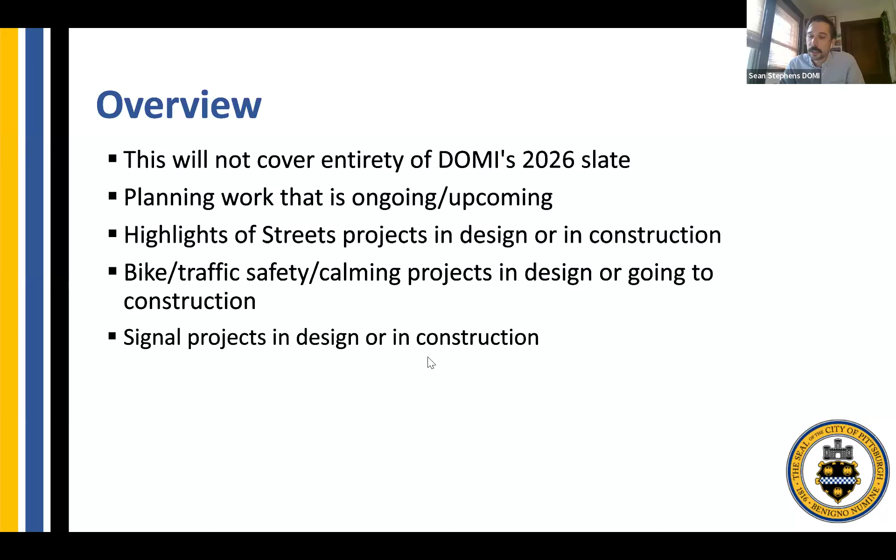We'll highlight some of the streets projects that are either in design currently or going to construction, and then talk mostly about Vision Zero projects, including bicycle traffic safety and calming projects that are either in design or going to construction in 2026. We'll also highlight signal projects that touch on some of the bike facilities in the city that have the opportunity for feedback or are going to construction this year.

First up is one of our newest projects, the Lincoln Avenue Multimodal Safety and Accessibility Improvement Project - quite a wordy title. This is in the East End, in the Lincoln-Lemington neighborhood of District 9. The extents are Atwell Street to Verona Boulevard. So once you cross over Washington Boulevard over that larger bridge and enter the Lincoln-Lemington neighborhood, that's where the project extents start, winding up the hill to almost the city line. We applied for a DCED grant, which we were awarded.

That grant is $750,000, which will include planning, design, and ultimately construction. We're first going to kick off planning work, slated to start in summer of 2026. We're still working through the grant agreement and execution. Planning work is forthcoming, and the scope is likely to include a combination of quick build and permanent hardscaping, as well as traffic calming elements and bike connections based off of the Bike Plus plan. We have planning, design, and construction money, and we're trying to do most of this as in-house design and use on-call contractors, but the final scope is yet to be determined based off the planning efforts. Be on the lookout for engagement on this project starting later this year.

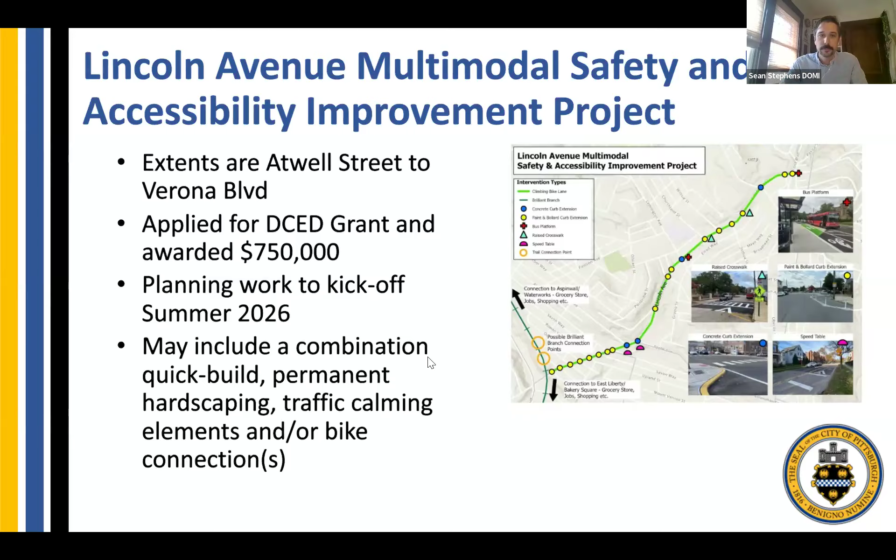Next up is another project in planning currently, which is the Schenley Park connector. This was part of a 2026 RAD ask that was funded to do a bunch of work in city parks across different locations in the city. I believe it was about $2.6 million total for the entire RAD-funded city parks projects, and almost 50% of that will be dedicated towards Schenley Park.

We developed several options to improve bicycle and pedestrian safety and connectivity through the park. The real focus is on connecting those park roads, with better connections to existing and future projects in Oakland, Squirrel Hill, and adjacent neighborhoods. Schenley Park isn't just used as a recreation area and for fun, it's also a big thoroughfare for people commuting, especially by bike and walking, into Oakland and Squirrel Hill. There's additional planning and outreach forthcoming, and we are partnering with Public Works and the Parks Conservancy on this project.

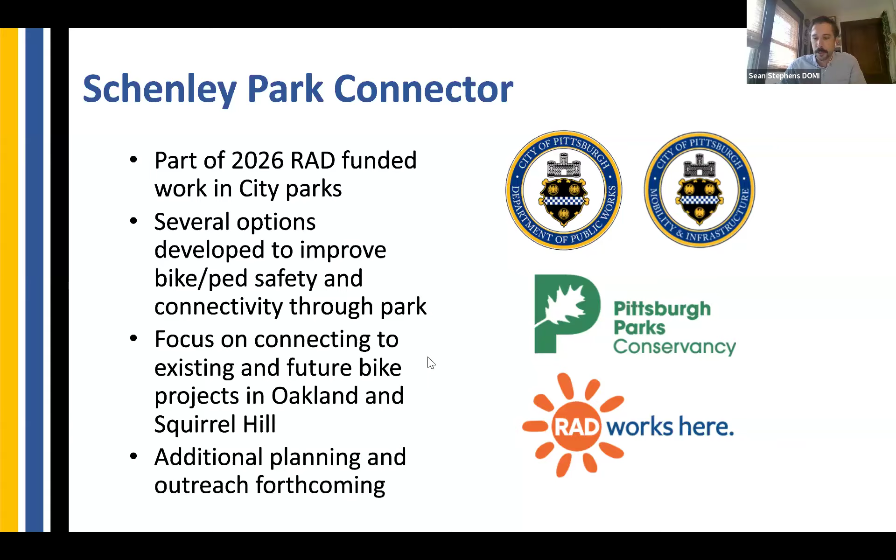Next up is some streets projects, starting off with East Ohio Street on the north side. I'm sure folks from the north side or involved in Bike Ped projects are intimately aware of this one. We did a multi-phase planning project that included not only the city-owned portion of roadway in the neighborhood, but also the PennDOT portion going from East Street to 16th and Chestnut. We were able to secure funding for the city-owned portion, between Cedar Avenue and East Street.

For those not intimately aware of the project, the biggest focus is on pedestrian and transit improvements through this corridor. You'll see things like a raised intersection, a raised crosswalk, concrete curb extensions, as well as bus boarding islands or loading areas, so we can service both front and back door and really provide a good transit platform through the corridor. Shown here is a map of the intersection of Cedar and East Ohio that includes protected intersection elements. There are bike facilities with a climbing lane on Cedar Avenue, and East Ohio Street has bifurcated bike lanes that connect to Allegheny Circle, where there are additional protected intersection elements we did with the two-way conversion project a number of years ago.

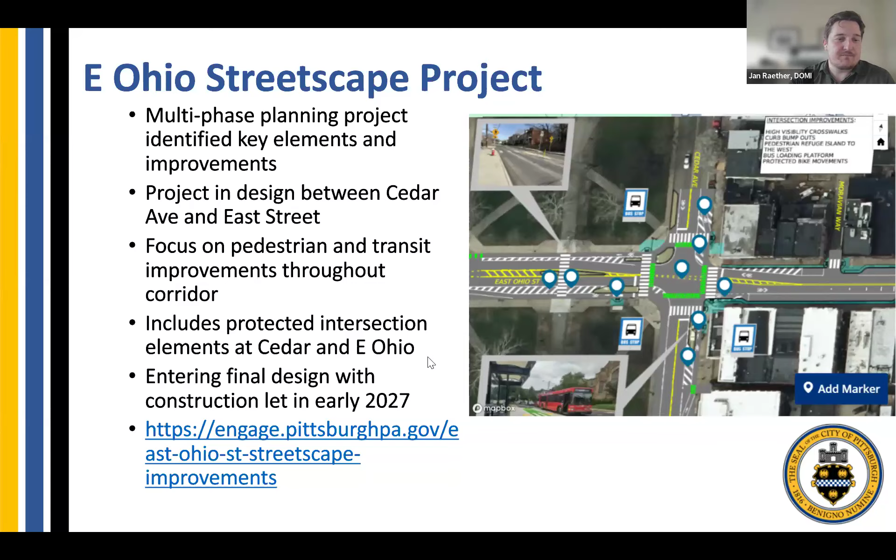So be on the lookout for that. And I'll jump in and say right now, all of our feedback on the Engage page is at Cedar and East Ohio. Would love to see that map get filled in with feedback between those stretches. The Engage page is in the chat, and we've got a tool in there where you can drop a marker. So encourage folks to do that if you're familiar with or use the corridor. Definitely.

Next up is our Critical Sidewalk Gaps program. This one's been around for a number of years with the main mission to fill in large gaps in the sidewalk network to link to essential community resources like schools, parks, transit stops, and senior centers. We partner with a bunch of different organizations and programs for this one, primarily Safe Routes to School, to make sure that kids walking to school can do so on an accessible, open sidewalk. This was established as a program in 2020, and the team has completed over 4.5 miles of sidewalk across the city, which I think is a really great achievement that goes under the radar in the whole slate of what DOMI does. So big shout out to Kyle Potter and Avasek Greenwell, who lead this program and do really great work.

For 2026, we have a list of locations developed with Engage pages that are created or forthcoming, so you can see where the planned work is for this year. One note - I think there's one project that's actually in construction right now on Summerlee Street in the West End, I believe. But like I mentioned, check out the Engage page for this, and you can also see some of the past projects and what that team does.

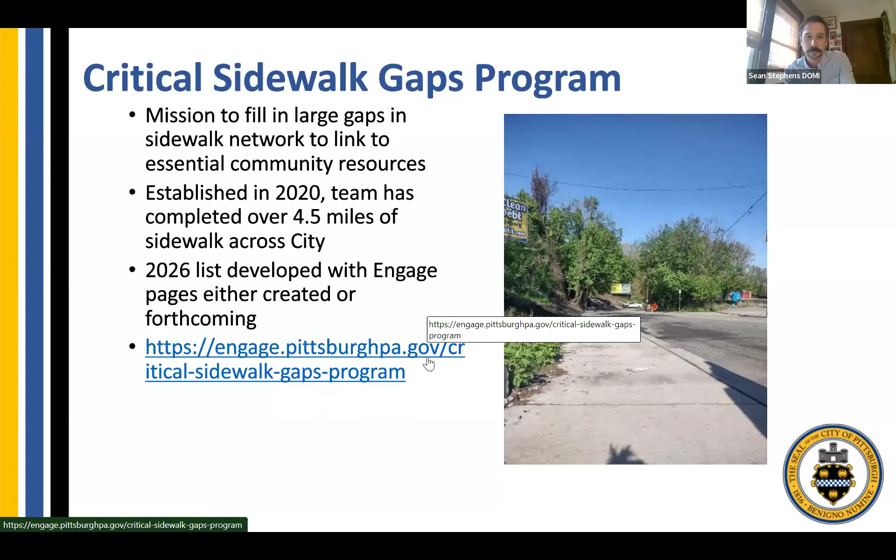Next up is our transit stop improvement program. This is a newer program that was only established last year, run through a partnership between our curbside management and policy folks, as well as streets who do the actual concrete work, and of course working with PRT to locate and fit in the shelter and make sure it aligns with long range planning and whatnot.

So this was established in 2025 through the capital budget, which funds shelters and sidewalk connectivity and improvements to transit stops. The added benefit, which is really great, is most of the time this improves intersection safety as well, because we're doing curb extensions or boarding islands, which have a nice traffic calming benefit and just overall general life improvement for transit riders.

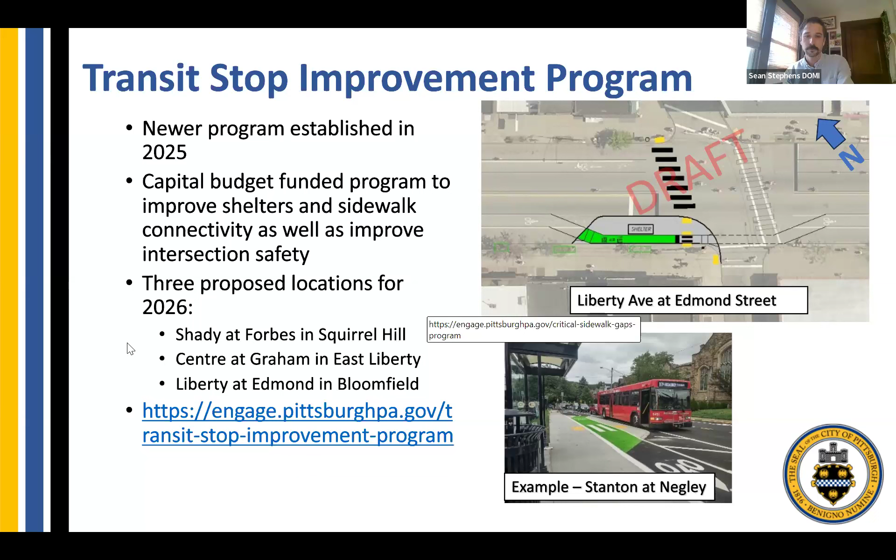Next up is sort of my bread and butter, which is the Vision Zero projects for 2026. I co-manage this with Paige Anderson, who I'm sure a number of you are familiar with - she's another project manager working on these projects. For 2026, the capital budget has allocated $1.1 million, which is about the same as last year, so that's really great to maintain. And this also funds more than just project implementation, but a couple other elements, which I'm going to talk about.

On the project side of things, we've identified 15 locations and projects to do intersection safety work with targeted improvements towards vulnerable road users—our pedestrians and bicyclists. That can include raised crosswalks, quick build curb extensions, hardscaping where budget allows, as well as upgrading some of the vertical elements we use.

We also have 8 locations targeted for traffic calming, which would be more traditional speed humps and speed tables on our local residential streets.

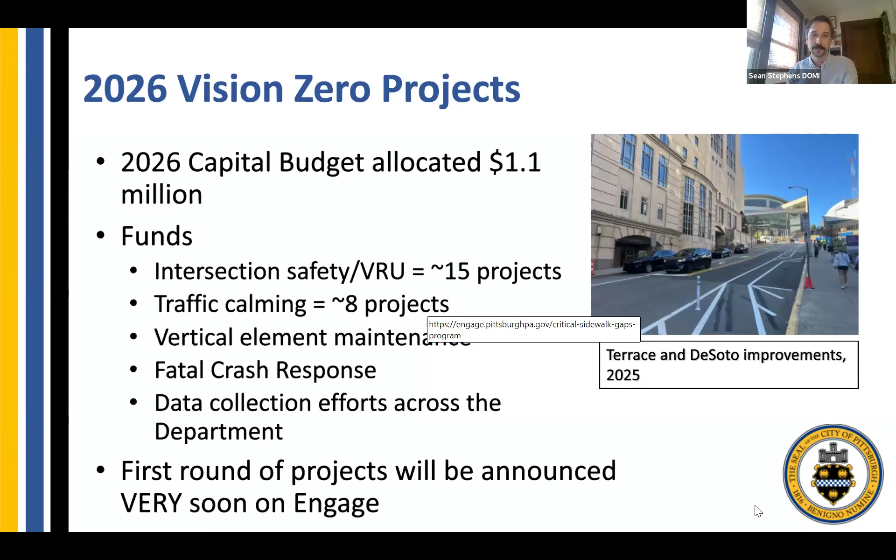Now moving on to some of our more bike-focused projects. Some of you might recall the Second Ave cycle track connector to link the 10th Street Bridge to the Eliza Furnace Trail. This will be using part of 2nd Avenue and actually a parking authority lot to get you on the trail. Right now it's very disjointed and there's a gap here.

Part of the reason this has ebbed and flowed is it's integrated with the Smart Pittsburgh signal projects, also known as Smart Spines, to upgrade signal connectivity through 5 major corridors within the city. That will be taking care of some of the signalized intersection components of this project.

But the plan is to use quick build materials and precast concrete curbs to do a very small road diet on 2nd Avenue to carve out a bit of space for a cycle track to get you from 10th Street Bridge to the Eliza Furnace Trail. This is entering design, with the aim of construction in 2026. An Engage page is forthcoming as well.

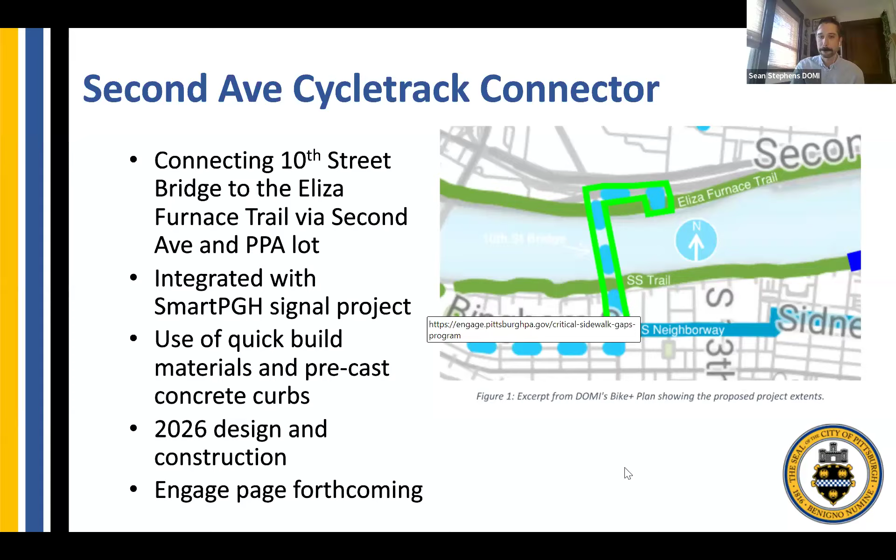Next up is Stanwix Street, downtown. This is between Forbes and—excuse me, it's actually Forbes and 4th Avenue. And I'm sure many of you who bike downtown have...

...seen some persistent issues with parking in the bike lanes here. This project is really aimed at curbing that—pun intended—where we want to allocate additional space in the roadway for loading that happens at adjacent buildings, to keep the bike lanes open. We're not going to be changing the bike facility at all; there won't be a degradation there. It's mostly reallocating roadway space and doing a small road diet on Stanwix Street to accommodate loading.

We're working with Safe Routes to School and City Charter in that adjacent building on these efforts, and this is a 2026 deliverable as well.

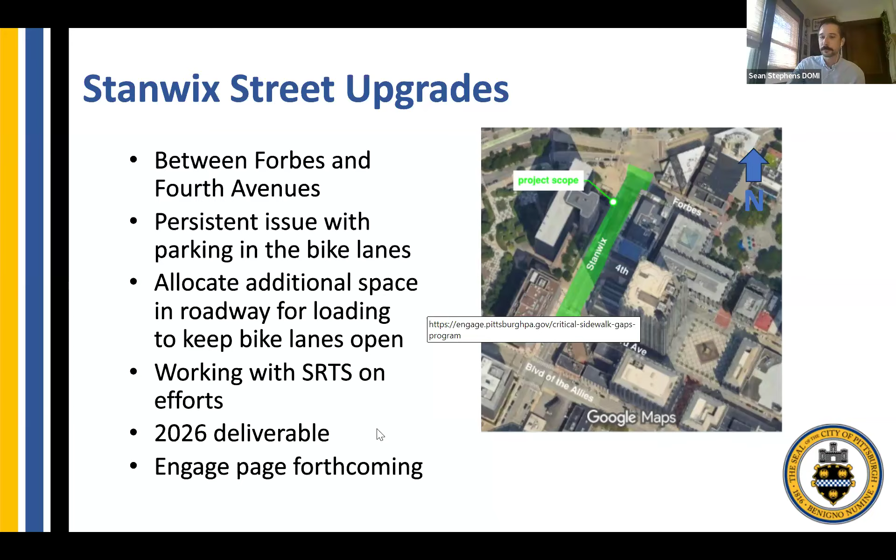Some projects are carryover from 2025. For those who live in the South Side, I'm sure you know about the South 18th Street project that we did as a traffic safety corridor last year. We were only able to partially install in 2025 due to utility conflicts.

As everyone knows, PWSA and People's Natural Gas are seemingly everywhere, so we try to coordinate with them to make sure we install things that don't get ripped up in the same construction season. This was one we coordinated, so we were able to install Carson to Crossman, which included the bicycle climbing lane, some speed tables, and other intersection elements, but we were not able to install Crossman up the hill to Monastery.

The utility work there is at completion or very, very near, so this should be one of our first projects right out of the gate in the spring to finish this off. If anyone is not aware of the project, there's a really great Engage page that shows a schematic of what's been installed and what's left to be installed. Before we enter construction for this final phase, we'll update the Engage page and issue a press release as well.

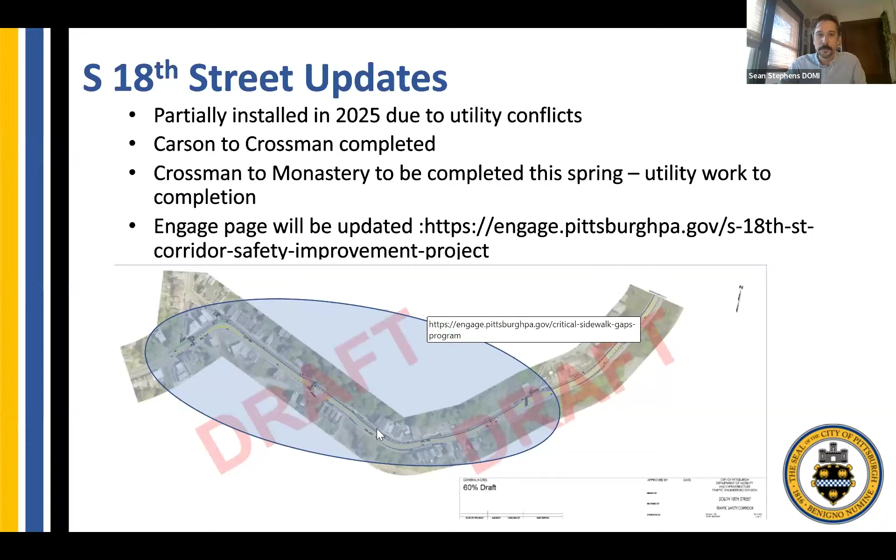There's also a few other carryover projects from utility conflicts or coordination. There are 3 traffic calming projects on Baytree Street, Itin Street in Spring Hill, and lastly Lorenz Avenue in Elliott. If any of you were involved with the West End Mobility Study, I know Lorenz Avenue was a focus, so that was sort of a neat little overlap where we were already targeted for traffic calming on Lorenz as a deliverable.

So be on the lookout for those this year. There are also 2 intersection safety projects that include a pedestrian refuge at Highland and Jackson, and additional intersection improvements at Murray and Welfer in Greenfield, both coming this year. Most of these already have Engage pages, so if you're not familiar, please check them out, and we'll announce construction when they are ready.

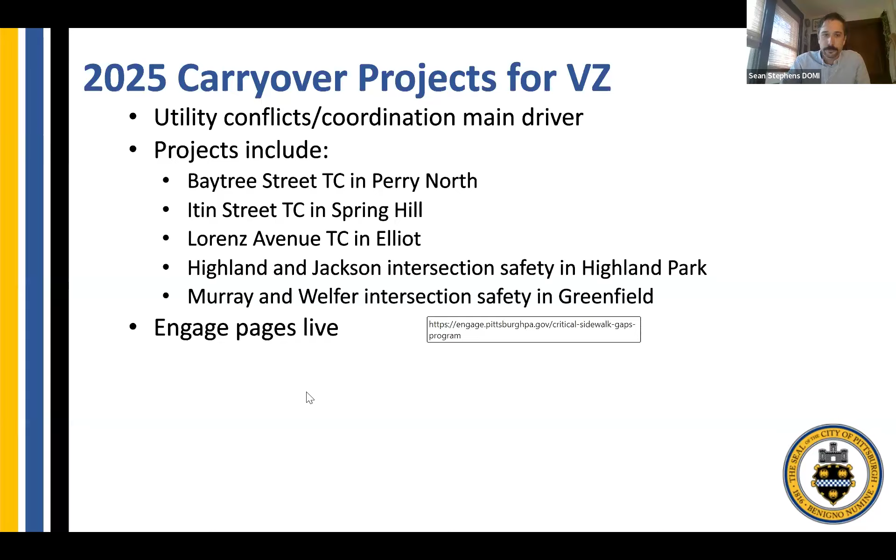Now a little bit on traffic signals for 2026. This is a very small subset, to be honest, but ones I wanted to highlight for this group. Beechwood Linden Wilkins is a full signal upgrade through our capital budget with some grant funding. This has gone through a planning process with a pretty large community meeting, I think end of last year or maybe early this year, that includes some really great protected intersection elements.

There's an Engage page that has a lot of good materials on what we're planning, and this is going to construction in 2026. We are just wrapping up some final aspects for design and then working through some permitting with PennDOT, as Wilkins is a state-owned roadway.

Next up is Brighton Heights Boulevard at California and Terman. We're working on a complex intersection analysis at this location in Brighton Heights, where we've developed 2 alternatives: one including a realignment of the intersection, and another with just traditional curb extensions, with the biggest goal of improving connectivity for pedestrians, since some of those crossings are quite long. It's one of our lovely 5-point intersections, which is a bear to navigate for everyone, I think, so we are still collecting feedback for this location.

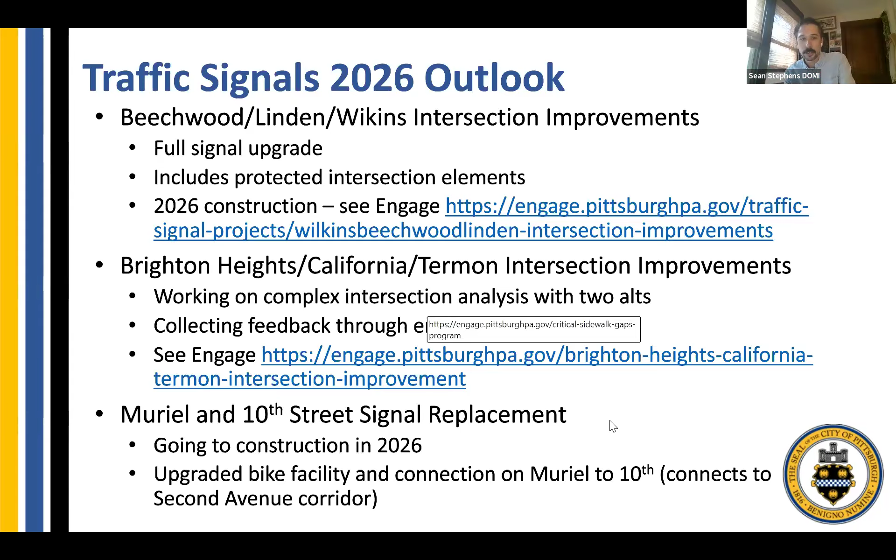And then last but not least, I'm going to turn it over to Jim to talk about the Strip District.

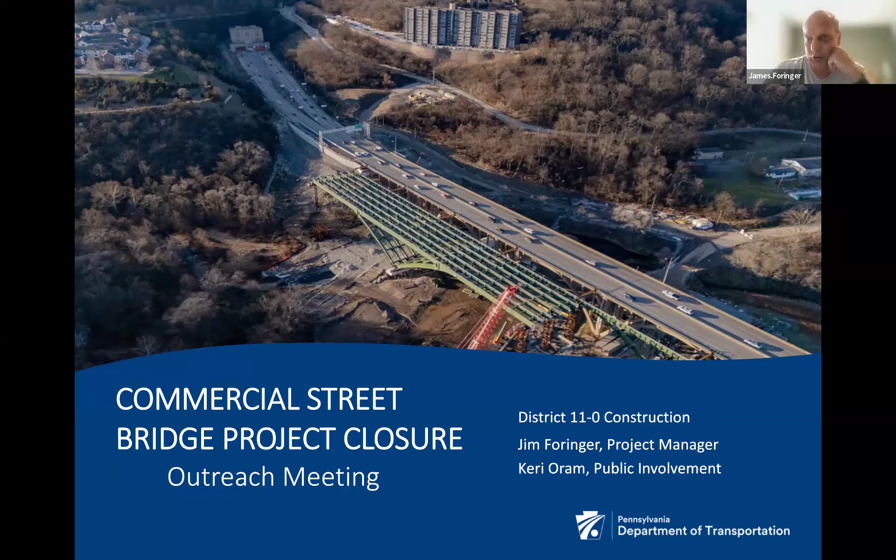We're excited to talk to you about the Commercial Street Bridge project, and it's very exciting for all of us. We're going to give you a quick project summary, an update of where the project is, the timelines, and go over the detour routes. And the extensive public outreach that we've been performing is our reason for talking to all of you tonight.

To put it in perspective where it is: it's a $95 million project. Fay S&B USA is the contractor, HDR from downtown was the designer, and Michael Baker is doing CM/CI support, construction management and construction inspection. It's funded by Federal Highway, and it's a PennDOT District 11 project, so they're the owner managing the project overall. The project is over Frick Park, just east of the Squirrel Hill Tunnel, and kind of adjacent to the old Irish Center.

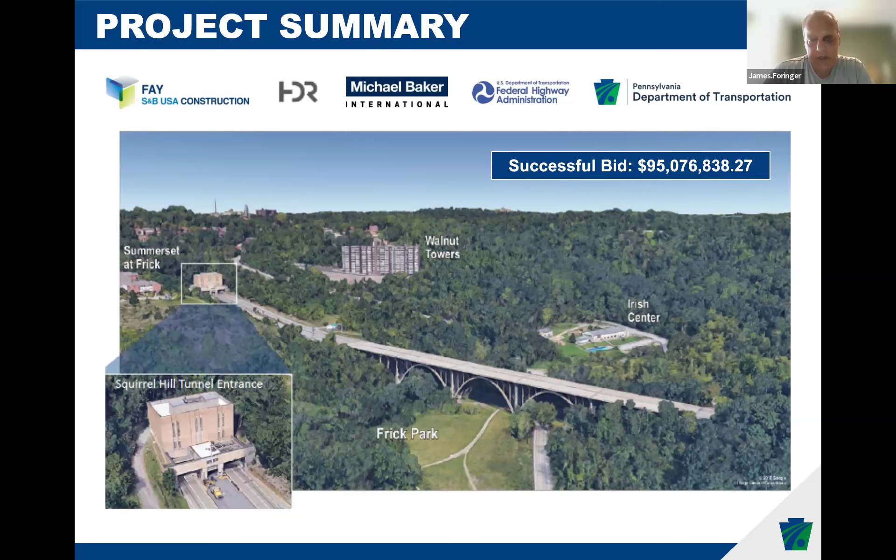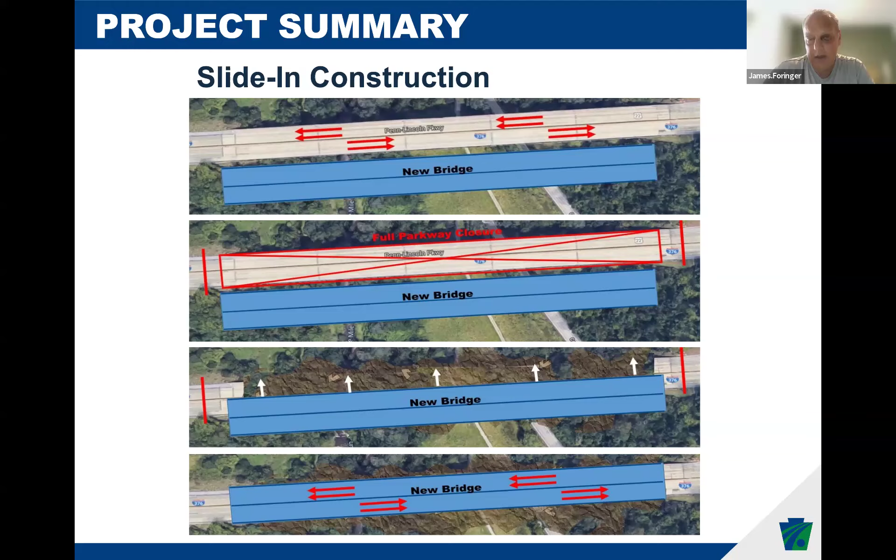A lot of you maybe have been wondering if we're relocating it, if you've been driving past there or even riding your bike underneath it. We're building a new bridge, actually off alignment, and we're not realigning the parkway. So we're going to have a full parkway closure, demolish the existing bridge, and slide the new bridge into place laterally. If PennDOT had not done it this way, it would have taken about 4 years of lane closures, changes, and traffic impacts. Instead, this is going to be done in 25 days, and we'll give you more details on that. To put it in perspective, the bridge weighs 22 million pounds, so it's extra expense for PennDOT, using the best technology out there.

As for project updates, you can see the structural steel was completed back in February. We're now in the process of forming the bridge deck, and the entire bridge deck is going to be on the bridge as well. Currently, Commercial Street is reopened.

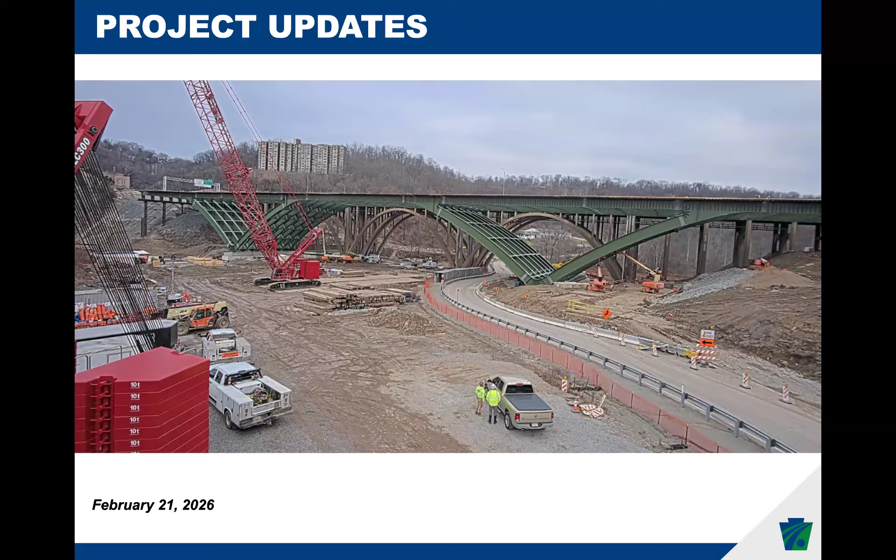So that's kind of the status of where we are now. The project timeline: we started back in structural steel last summer, we completed that, and then the foundations.

After we get the bridge deck on, we have to perform a small temporary slide to make sure all the equipment is working before we shut the parkway down and implode it. We'll give you the exact dates, but we'll be closing the parkway for 25 days, then doing cleanup and restoration under the bridge. That area will be fully restored, with close to a year of restoration work done under the bridge, completed next June.

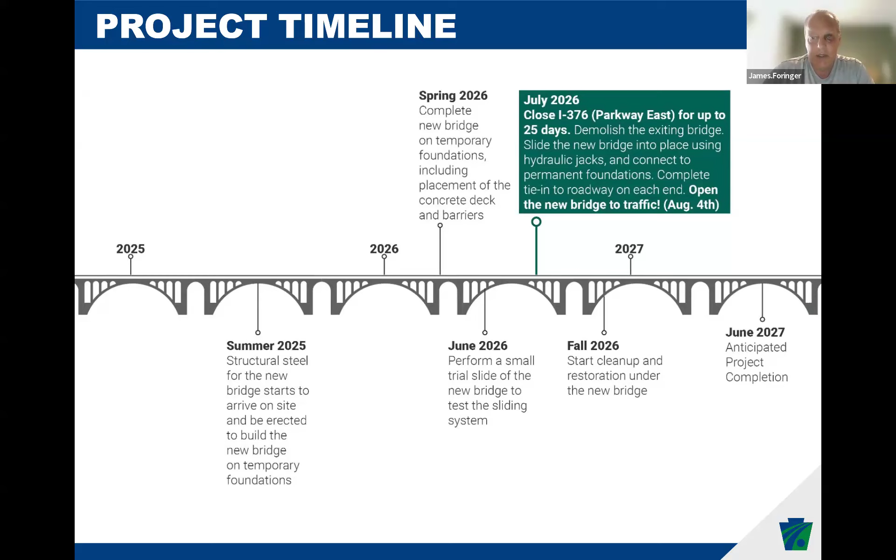As for future traffic restrictions, Commercial Street, which includes the 9-mile run trail, will be closing sometime in June. We'll probably close it for a day or two to do that temporary slide, then reopen. The contractor is working with the department to keep it open as much as possible. We realize what a vital link it is, with many bike users and hikers using the trails. Then we'll do cleanup and reopen in mid-August, though we're hoping to beat that date.

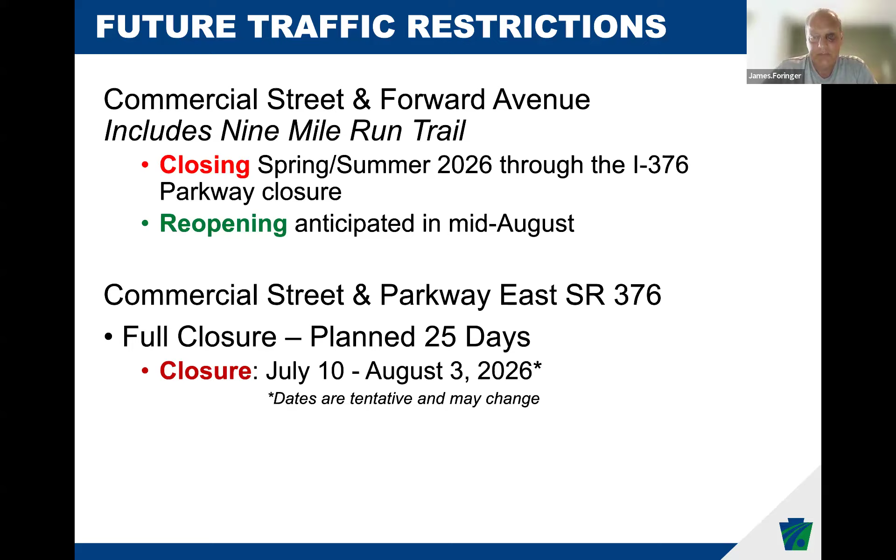The most important dates for the traveling public, when it's going to be shut down, are July 10th to August 3rd. Those are tentative, but we're on schedule right now to make those dates. Unless there's something unforeseen we're not aware of, we'll be shutting down the parkway and detouring 100,000 cars a day. So what do those detour routes look like?

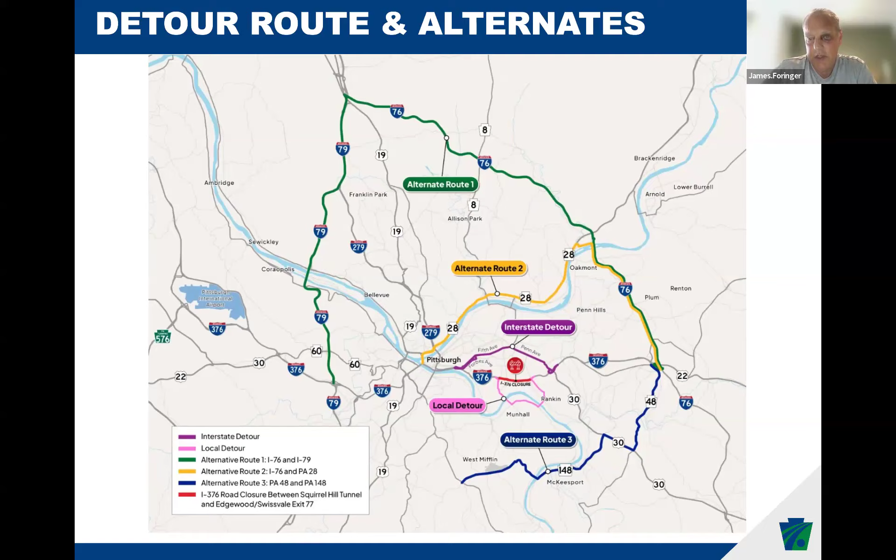We recognize they're not ideal detours. The green, yellow, and blue alternate detours you see there—we're trying to encourage through travelers to use the alternate detour routes. That means staying on the turnpike, going up to 79 and coming back down, or getting off at 28 if you're coming into Pittsburgh and want to route around, or even going south across 48 and through McKeesport over to West Mifflin.

Zooming in on the project site, we're closed right there at the project area. The Commercial Street detour is shown in blue.

The purple detour is the interstate detour, basically from Forbes Avenue on the west side to the Wilkinsburg exit on the east side. Coming westbound, the detour is getting off Penn Avenue up to Fifth Avenue through Oakland, then back down Fifth Avenue and that slip ramp back down onto the Boulevard of the Allies, and vice versa coming eastbound.

The local detour, shown in pink, is getting off right at Squirrel Hill, going down Beechwood Boulevard, Browns Hill, making a left and going out 8th Avenue, Route 837, back across the Rankin Bridge, back up Braddock Avenue, and getting on the Parkway eastbound at Route 30. Again, these detours aren't ideal, but we're going to man them.

There are some associated ramp closures I'm not showing for the sake of time. The Bates Street on-ramp heading eastbound will be closed. Coming out the Boulevard of the Allies will be closed for getting down onto the Parkway, so they'll have to go on to Forbes Avenue and take the detour. Coming westbound, there's an on-ramp out at Churchill that's going to be closed.

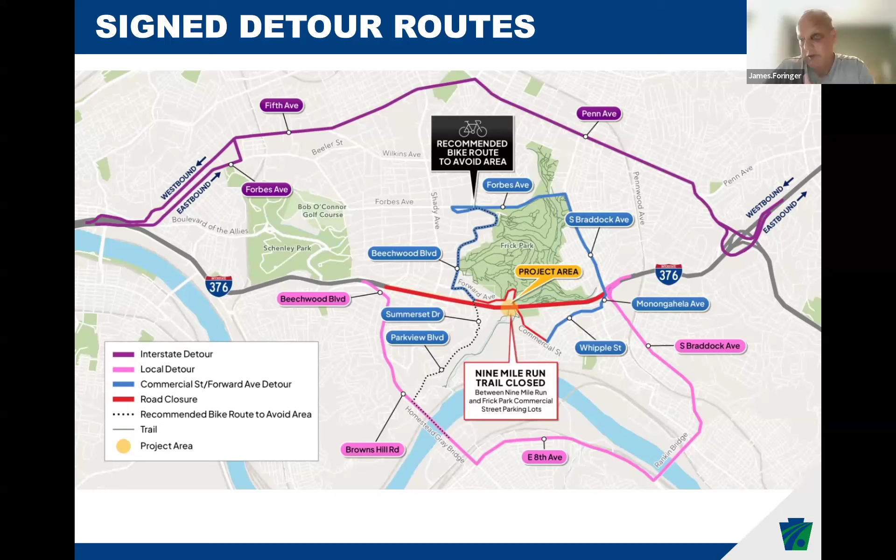People will just have to continue on down Penn Avenue. And there's an on-ramp westbound out there that will be closed coming from Route 30, because there's no sense in them getting on when they'll just have to get back off and detour.

We've identified police locations, working with the city and with DOMI. We know that's a lot of off-duty police officers to staff, so we have them prioritized—really prioritizing the interstate and the local detour routes, not the other areas through the communities. We want folks to use the detour routes and not jam up the neighborhoods. With these major detours, we'll be reacting once it's closed and looking at pinch points and what we can do to improve the workflow.

Along the intersections on the interstate detour route, we've been working closely with DOMI. They're upgrading other signals to make them operate more efficiently with timing, so they can even adjust those timings during the closure.

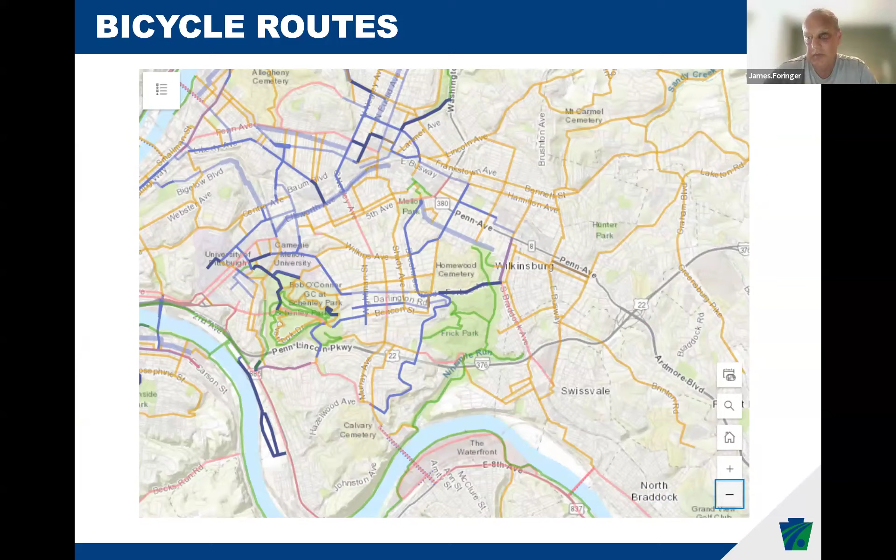We've done extensive coordination with emergency services. We've had two incident management meetings, and we'll be having a third one. With the city of Pittsburgh, the contractor is going to provide an extra UTV for emergency services, so there's one on each side of the closure, because of the trail users that have shared with us there have been some pretty serious accidents.

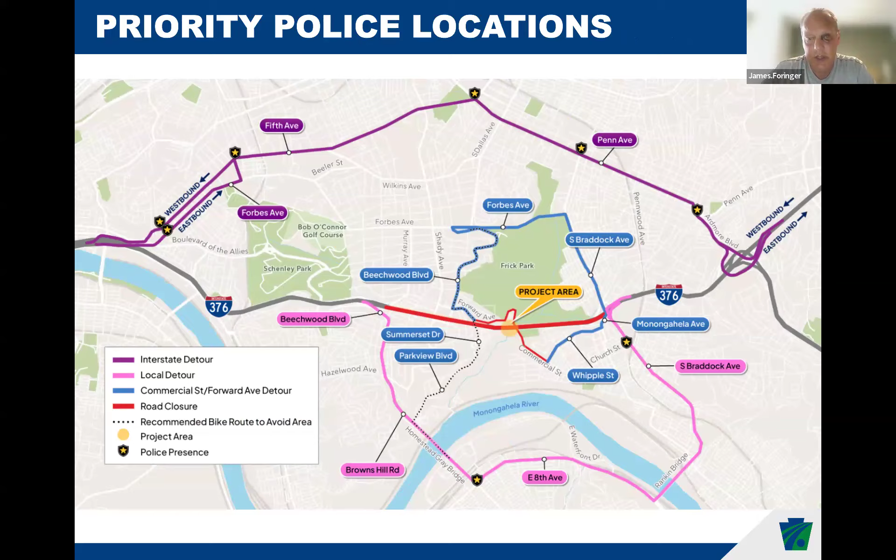They're doing some other staging for responses. We're meeting with Chief of Police Cogs and the Mon Valley Emergency Services. We've met with the UPMC hospital folks for their services, so they're aware. We've been doing extensive coordination with them.

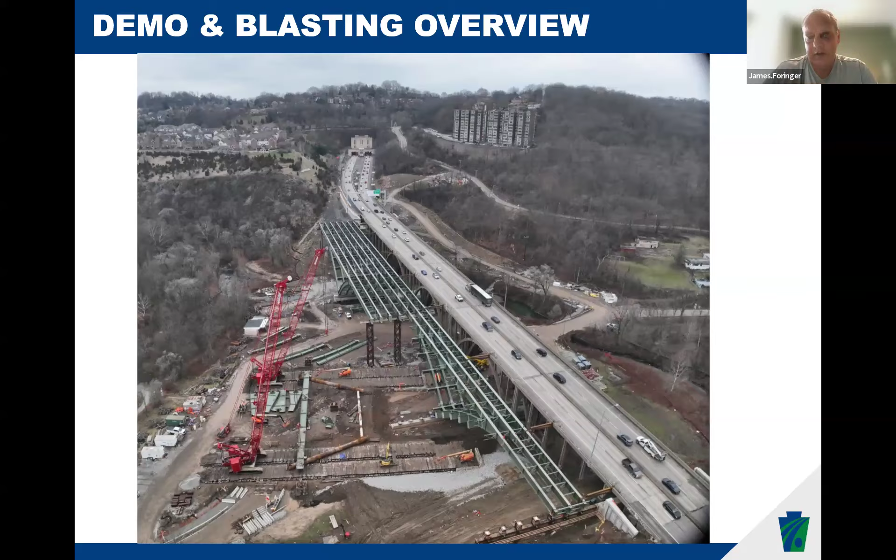The other thing I wanted to show you is how much is involved. This is an aerial view before all the structural steel was set. Why it's important, if you know trail users—and quite honestly that's why I think I can relate, I've honestly walked through places I shouldn't, or ridden my bike through places I shouldn't—that's just kind of a natural tendency. So this area is not going to be safe when we close, and I'm going to show you why. It really is not safe to go under this bridge after the closure.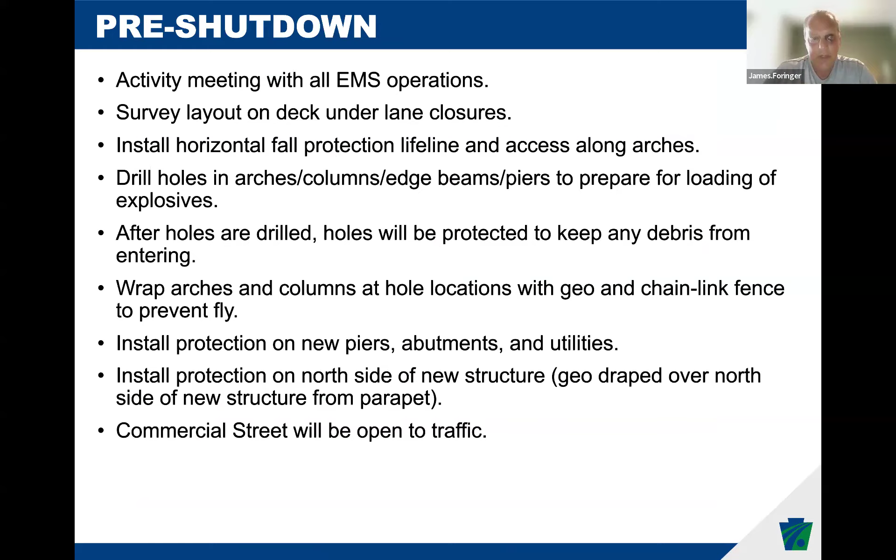They're going to be starting from the center of the bridge out each direction with conventional demolition. They'll have big hoe ram equipment and jackhammers up there, and they're going to be actually dropping concrete down below, so that'll be flying everywhere. It's not going to be safe to be anywhere close to this bridge.

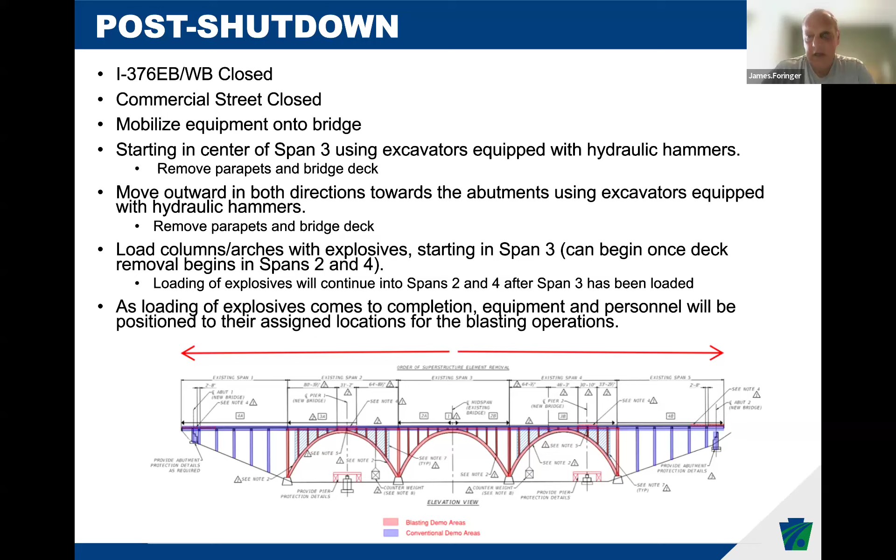We've already talked with the park rangers. They'll be up on the trails blocking them off so folks don't come down—we know from Greenfield that folks try to sneak through the woods. So one thing we've set up is EMS helping us with infrared drones, and we will not set that blast off until it's clear.

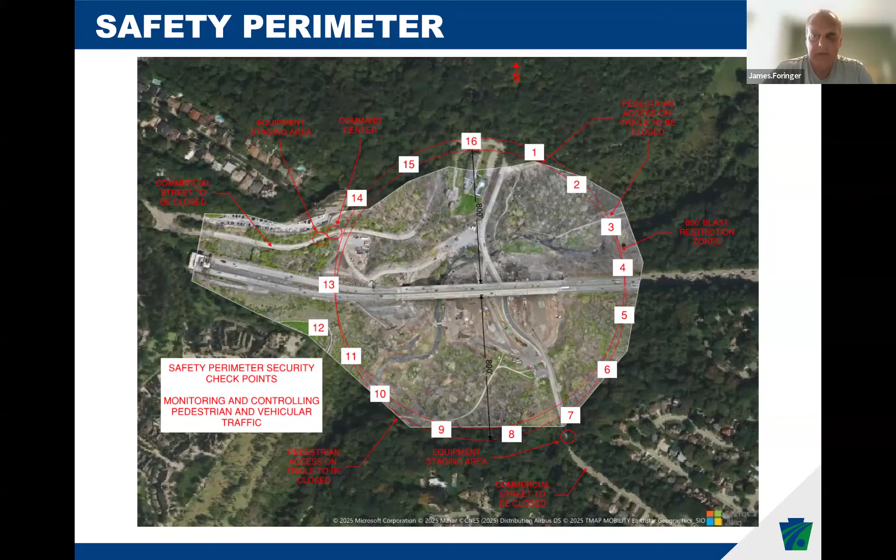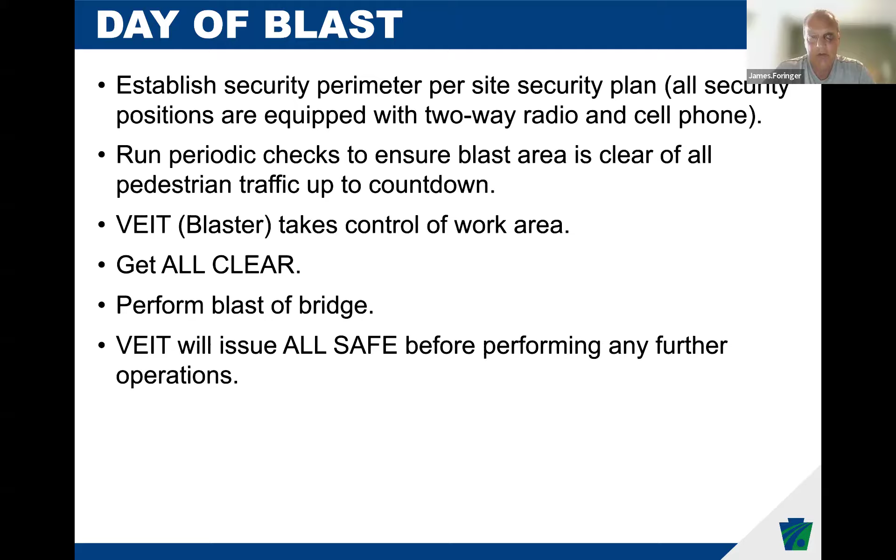So the day of the blast, again establishing that safety perimeter, running the checks. It's the blaster—they take control of the area, they set the blast off. Nobody goes into that area until they've verified all the explosives have gone off. So there's a lot of coordination and safety procedures put in place for the blast.

Post blast, we're dropping it down below, so we'll still be down there with the equipment continuing to rubblize and clear the area. The priority is to clear the area where we have to slide the bridge into, and then they'll also try to clear Commercial Street to get it back open. Some of the approach spans they're not going to implode—they'll be dropping and knocking over some of the columns on those spans. And then obviously we'll slide the new bridge into place.

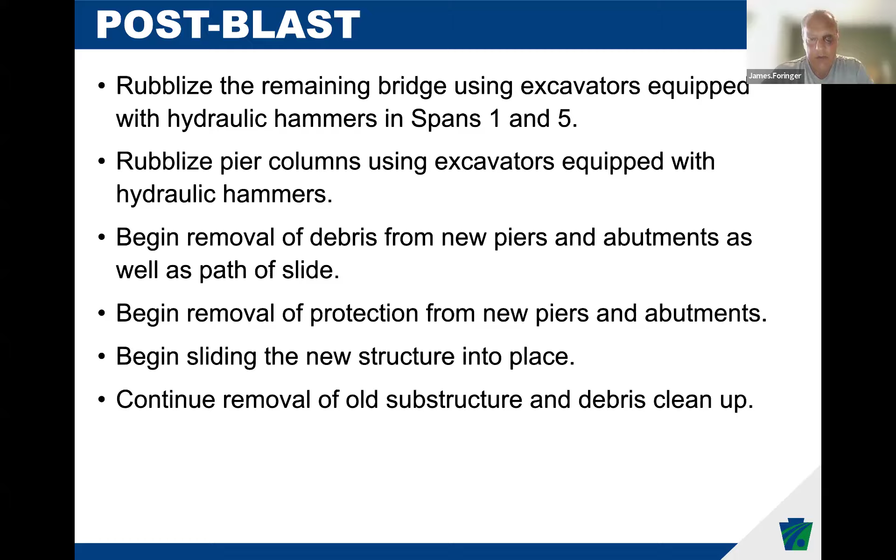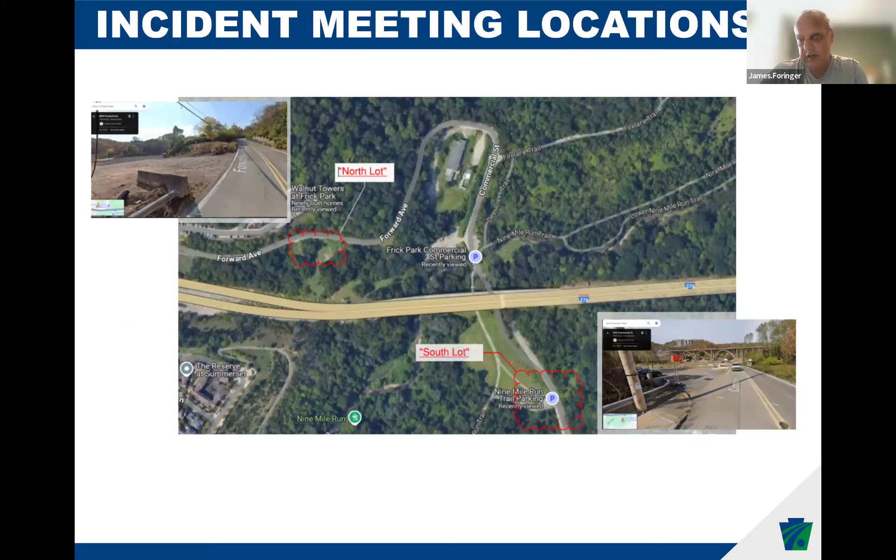This is where I forgot I had this in here. So this is the incident meeting locations for our folks on the job, so 911 knows how if we need access, if we have an accident on the job. This is also where they'll be staging the UTVs - one staged on the south side by 9 Mile Run, and the park rangers will be on the north side if they need any emergency rescue.

Our outreach coordination - I could probably talk the entire time about how much outreach we've been trying to do. So again, we thank you for the opportunity to come and talk to you. We have project handouts and a website, and we've been coordinating with PRT, emergency services, DOMI. We're reaching out to all the trucking firms, all the major vendors in the area, and we've talked to the Pittsburgh Downtown Partnership. So again, just ask all of you if you can help get the word out to your friends and family about the date of the closure.

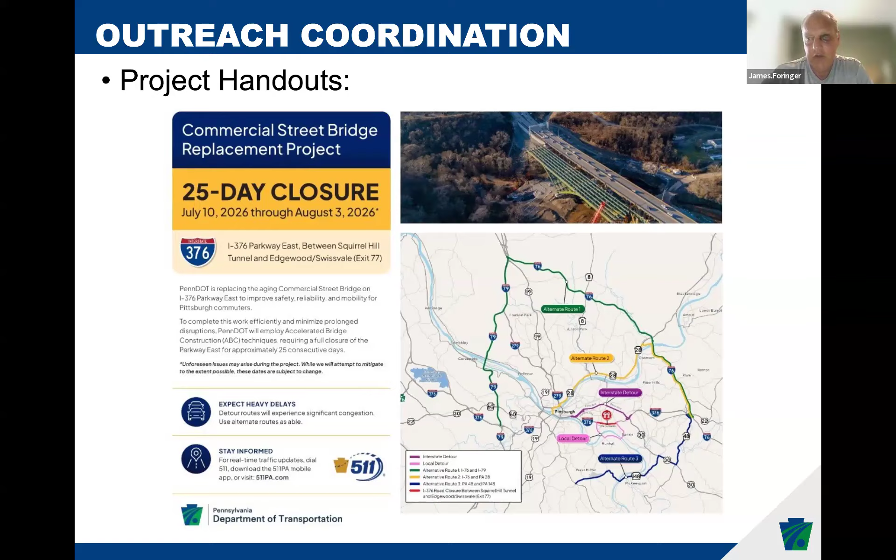There again, July 10th to August 3rd. 511, you see the logo there - we will have information posted on 511. During the closure, 511 will have active travel times for the detours, so we're encouraging folks to use 511 in lieu of the other mapping services.

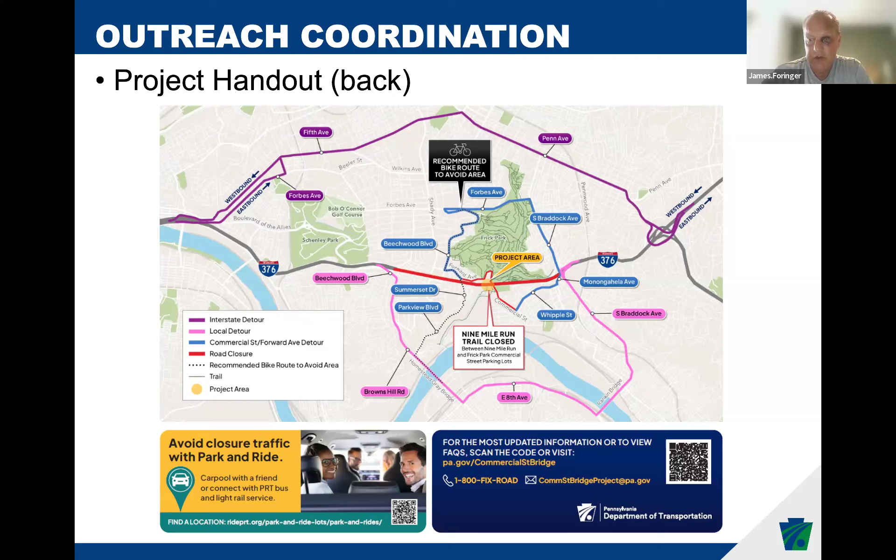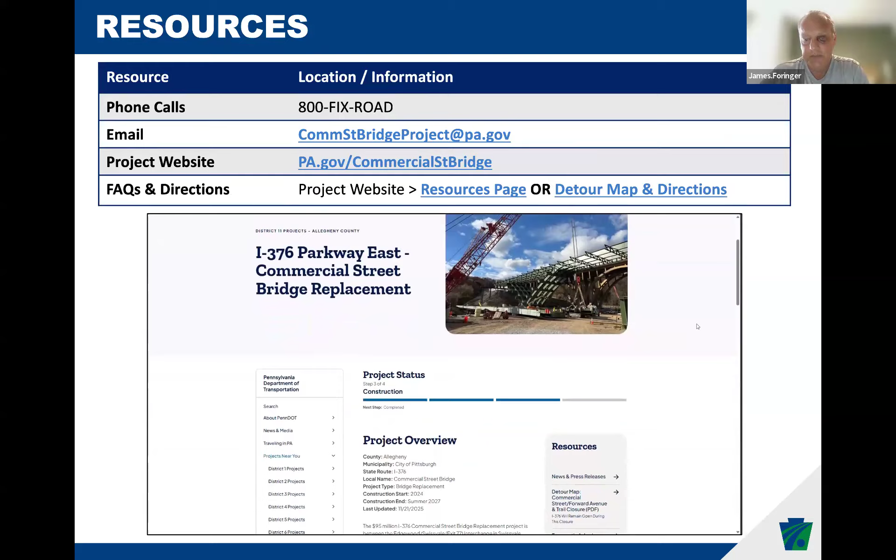And then this is the website. We're doing okay on time, so this just sort of shows you the website. Again, we have all this information - there's FAQs on the website, there's the maps, the handouts. We have toolkits we'll touch on, Yasmin's press releases and everything, and then the FAQs.

And then you can also submit a comment or a question there, and it'll go to our resource account and we will get back to you. And again, there's the artist rendering of what it's going to look like upon completion.

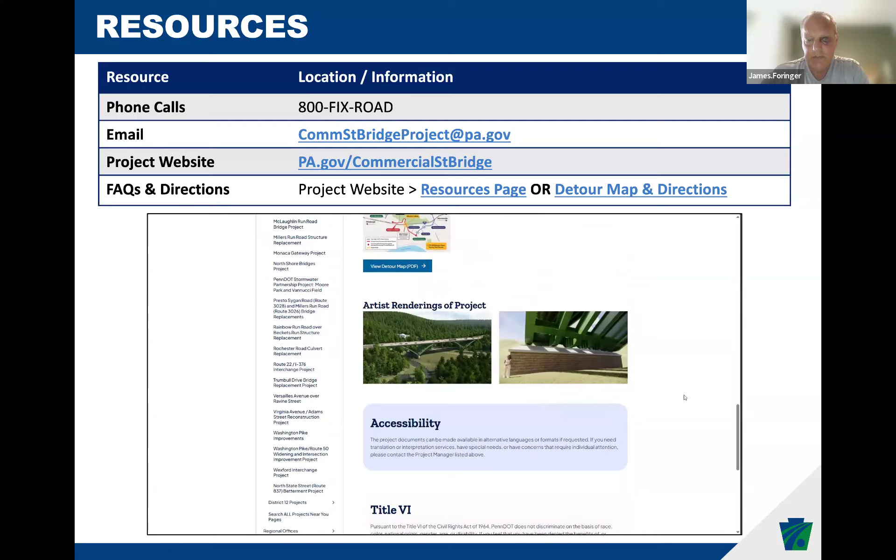The other thing, you can change the language on the website, so we think that's a great feature. And the handouts that I showed, we will be converting them into Spanish and making them available also.

On the toolkits that I mentioned, we're actually having flyers, social posts, newsletter content, the detour maps, even emails that businesses can send to their employees making them aware of it, and suggested website content for folks. And then if we have time here at the end, Carrie will pull up and show it in a bit more detail. And then social media - we want to encourage you to join PennDOT's Facebook group, the Greater Pittsburgh Area PennDOT. That'll have everything PennDOT related in the area, but it'll include Commercial Street Bridge and all their other projects also. And on X they have that set up also.

So I know that was quick. So if we want to answer questions, Seth, or if we want Carrie to show you the toolkit a little more - yeah, let's take a couple of questions here.

Mary asks a question that's also on my mind: are you contacting Google Maps and other mapping services to discourage them from giving drivers shortcuts, especially through neighborhoods? We have already talked to them and reached out - PennDOT did it personally. Unfortunately, they don't have the ability to do that the way their algorithm works, so it's just going to map if a road is open. So as a backup plan because of those neighborhoods, we are going to have some road closed, local traffic only signs available that we will put up, and then possibly send a closure notice out to those services to close that road. But we're trying to keep everybody mobile to get through the communities, so that's one of those things we're going to have to play by ear. We were hoping to be able to get them to map folks onto the detour, but they say they can't do that.

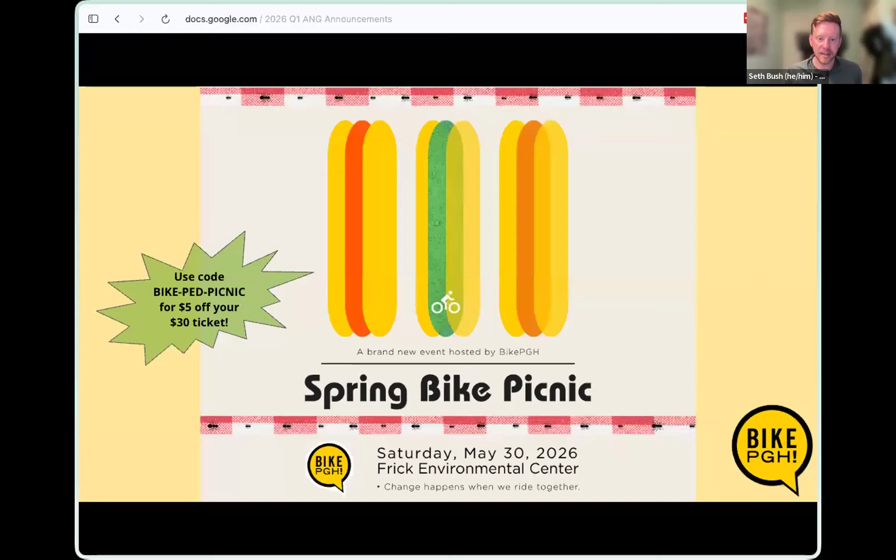We have a number of additional events coming up as we get into spring and all the fun stuff. For those of you who have heard about our Safe Sidewalks crew, this is our initiative to record data about every single sidewalk in the city of Pittsburgh. We need a lot of volunteers to cover this much ground. We have a training coming up on March 26th at 6pm, and then two Safe Sidewalks crew neighborhood blitzes or walks in West Oakland on March 28th and April 11th. You do not have to have prior training to come to those, just come by, get some snacks. We'll cover as much as we can in a neighborhood, and you'll get a very rapid training as part of that.

A couple other things, I will send this in the follow-up email, and I'm dropping it in the chat now too. We would love for you all to be part of this work and help us get some good data in your neighborhoods, which we think will support your advocacy. For some reason I couldn't include the links because Zoom was having a hard time, so I'll send them in the follow-up email.

Also, this is very relevant to all of you who really have your heads in the weeds of neighborhood advocacy. We are not doing our full day advocacy skills training that some of you have participated in. We are breaking it up into smaller parts this year.

Our next module is on April 21st. That is focused on identifying who are the people who have the power to make the decisions that need to be made for the change that you want, and how do you influence them. We're going to use a tool called power mapping. This will be on April 21st at 6 p.m. to 7:30 p.m. at the East Liberty Library in person.